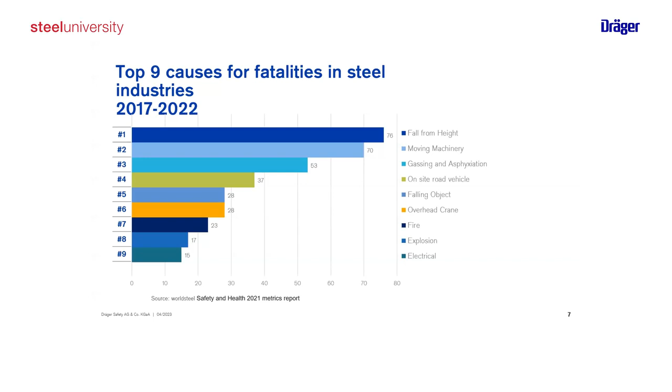Where do we have the risk of gassing and asphyxiation? Think about confined spaces. Think about risk assessments, risk assessments for confined space entries. Think about clearance measurements, leakage detections. If you want to do proper measurements, it's also about sensor selection. And of course, we have different kinds of work which is carried out that needs a risk assessment also for the risks of gassing and asphyxiation, for example, maintenance work.

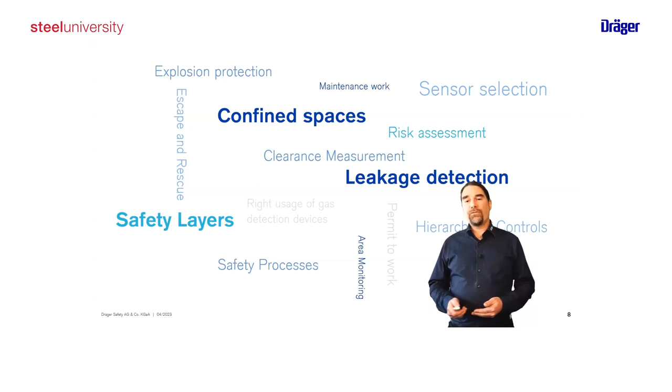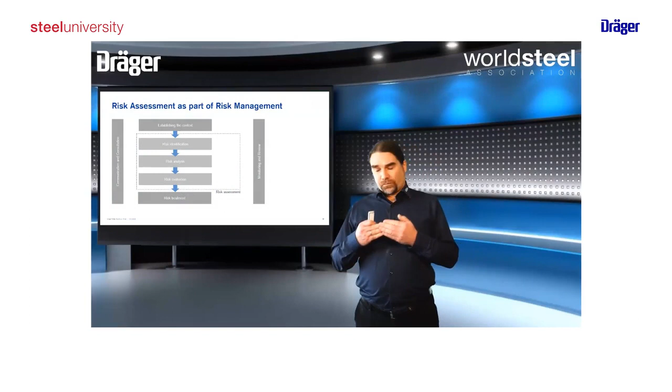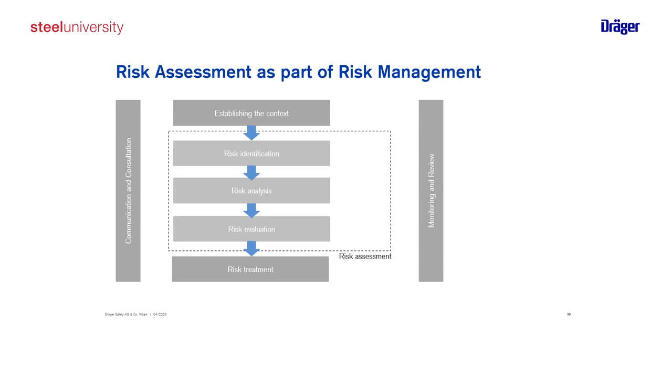Now, we will have a little bit of a deeper look into the topic of risk assessment. You all know this diagram of our risk assessment process as part of risk management. The first question we always need to address is establishing the context for which we are doing our risk assessment within our risk management. After that, it's about risk identification, risk analysis, and risk evaluation. After the risk assessment process, we are selecting countermeasures against the risk to reduce it. Let's call it risk treatment.

It doesn't matter which method you have chosen to use for you and your company. One approach is the bow tie approach. Within the bow tie approach, we have hazards which can lead to an event. This event is based on a threat and leads at the end to some consequences.

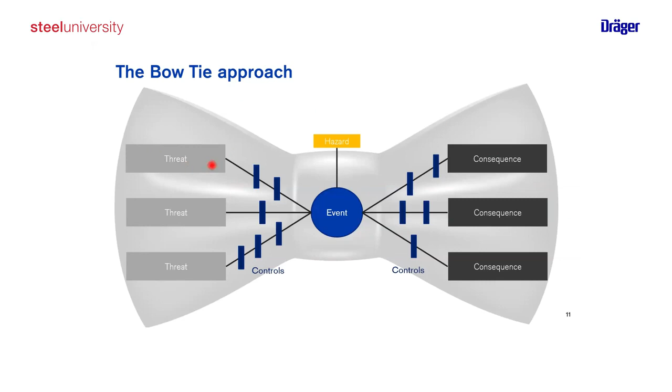The task of risk assessment now is to identify which threat leads to which consequence and which control method is effective to reduce, for example, the threat on the left side of our bow tie, or to reduce the consequences on the right side of our bow tie.

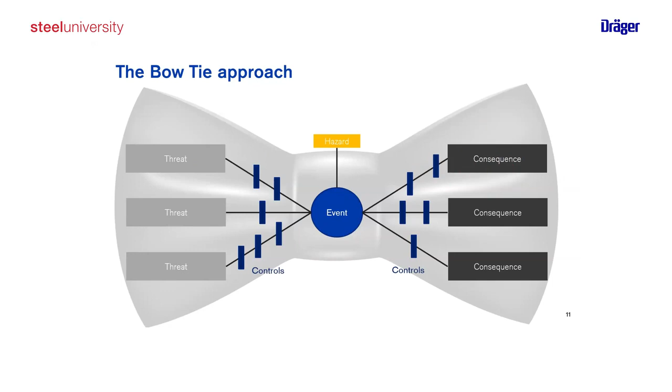Why are we doing this? We are doing risk assessment and risk management to protect not only property like facilities, vehicles, machinery. We are doing this not only to protect environment like lakes, the sea, the forest, soil. We are doing this to protect people - our colleagues, our employees, and also the people in the near surrounding, the neighbors of plants and facilities.

Now we go a little bit deeper in our risk assessment process. Risk identification is about finding, identifying, and describing the risks. So if you do not know what we want to talk about, if you do not know what we want to analyze afterwards, we have no chance to find measures to reduce the risk.

After risk identification, we do the risk analysis. Risk analysis is a systematic procedure to determine the risk. Of course, there are different ways to do this. A little bit later on, we will show you some or one of those methods and give you examples for that.

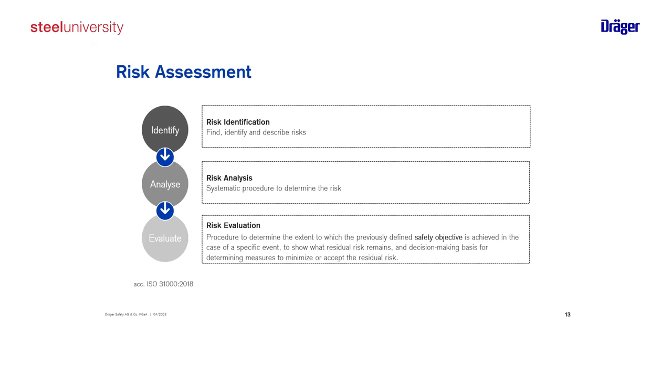We also have the likelihood, from rare - meaning this event takes place very seldom - up to almost certain. To give it some words: if you think about hitting your hand with a hammer and you do this once in your lifetime, it's rare. If you do this once a day, I think we have to consider other measures.

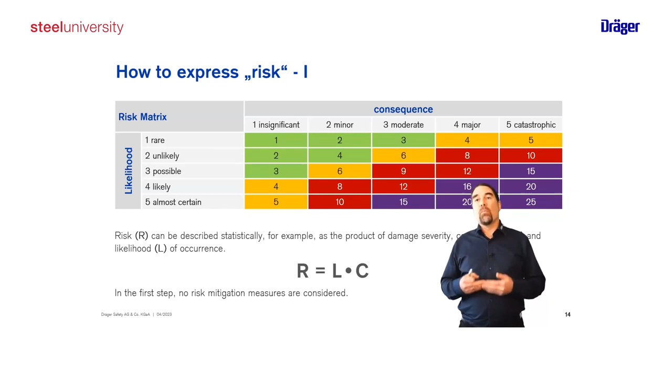Our risk can now be described statistically as a product of damage severity multiplied with our likelihood of occurrence. If we do this in the first step, we are not thinking about risk mitigation measures. We are calculating what will happen completely without any mitigation measure.

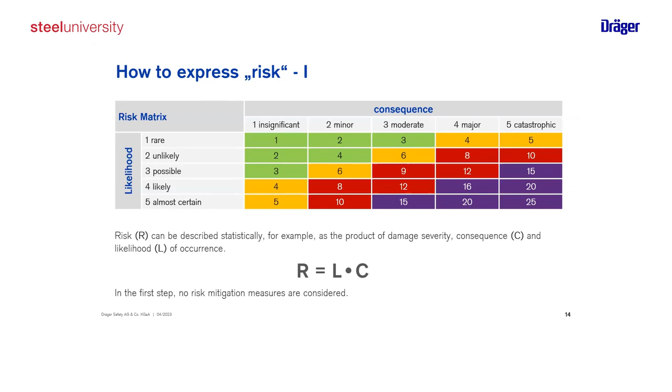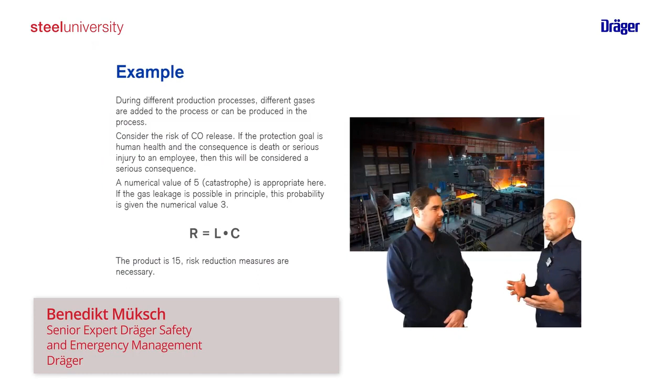So, Benedikt, may I please invite you to give us now an example from your practical experience? Yeah, thanks, Ulrich. So during the processes at our customers, there can be several gases produced. And today I would like to talk about carbon monoxide, which can be released in different processes too.

Have you an example for a process with carbon monoxide? Yeah, of course, the whole steel production. So if we have a combustion, there often is carbon monoxide which is released during the processes. A good example is pits - a lot of our customers have pits where the steel is brought, and there is carbon monoxide.

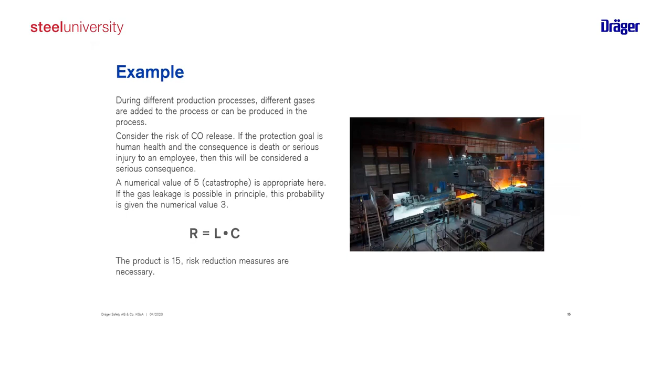As we stick to the example, for the risk assessment we have a serious problem if there is carbon monoxide and we do not have any safety measurements. What kind of problem would that be? The toxic problem of carbon monoxide. If there is a certain amount of carbon monoxide in the pit, and an employee goes into the pit to, for example, fix a technical problem, there is a concentration which could be toxic to the employee. So this would be, if there's no safety measurement, a catastrophic problem and could cause the death of an employee.

So of course, you always have certain safety measurements at your plants, but we just take this example: the death of an employee is catastrophic, so the severity is given as a 5. For the likelihood of this, we have taken a value of 3 in our example. So the product of this is 15.

So if you think on your processes, do you see also a likelihood of 3 that there can be carbon monoxide? And can you follow Benedikt in his example that this event - carbon monoxide present while a worker is inside - is catastrophic? I think there's no questions. So, Benedikt, please proceed with this example. Now we are taking countermeasures.

Yeah, as we implement safety measures, for example technical measures, such as having no leakage, you have flanges which are very good. So you can reduce this from 3 maybe to 1, giving you a much more safe process. So you are reducing the likelihood at this point, due to the technical measures.

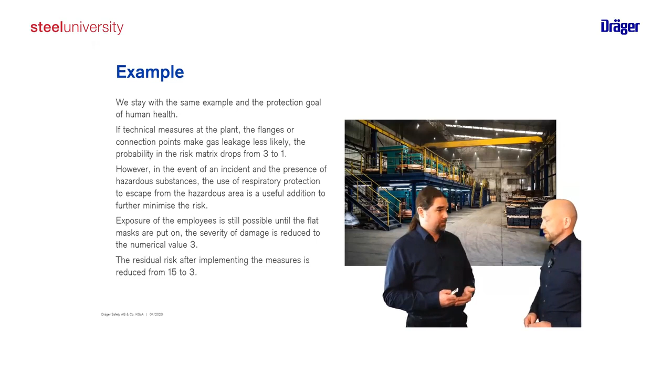So thank you very much, Benedikt. I will come to you a little bit later with more examples.

So now we have the risk of something we cannot directly see. We have an invisible risk. Within our risk management process, within our risk analysis, we are not able to express this invisible additional risk. I will give you now an approach of how we can make the invisible visible also in our risk assessment.

We are only adding one more factor in our equation, the noticeability N of a hazard. This noticeability can be immediate, for example you see it directly. Then the total risk is not increased because the factor stays 1. In our example it's possible, catastrophic, 3 multiplied with 5, we have 15, but because you can directly identify and see this risk, it stays at 15.

But we are talking about carbon monoxide. Carbon monoxide is a highly toxic, invisible, tasteless gas you're not able to notice. It's invisible to human beings. So our noticeability factor becomes 5. Our total equation, 3 multiplied with 5, possible multiplied with catastrophic, multiplied with invisible, becomes 75 at the end of the day. Now we are able to express our visibility, our noticeability of hazards, directly in our risk equation.

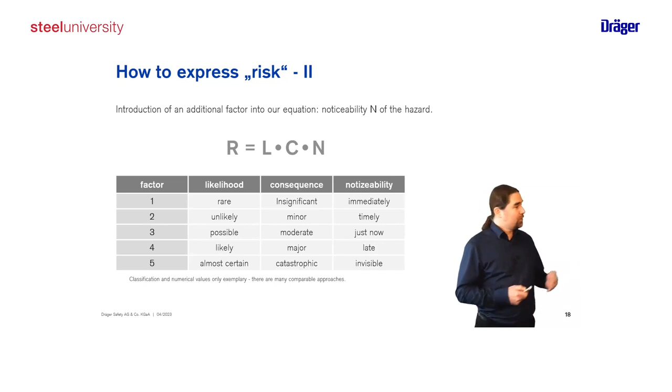Benedikt, I want to have one more example. Can you please give us here one more out of your experience?

So what can be the right thing at the right time if the gas alert sounds? For example, they need to know the right escape route, they need to know what protection equipment to wear to have a safe escape. And nevertheless, if there's a complex situation, you may need a rescue concept to bring, for example, some employees out of a confined space onto the earth floor side, to bring them outside to a safe place where you can then see if every one of your employees has made it to the safe places. So thank you very much, Benedikt.

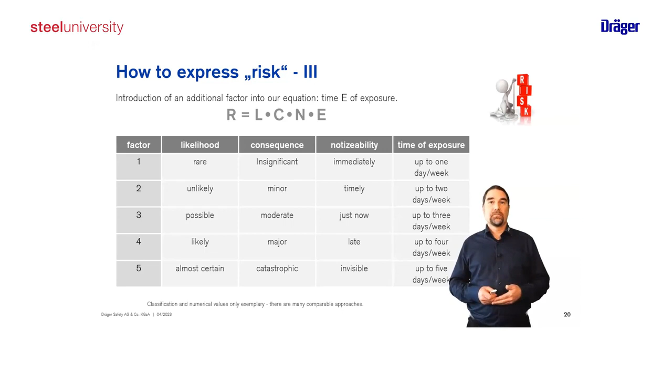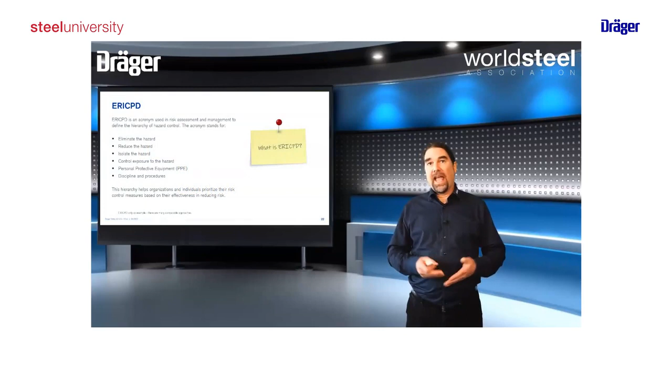This leads us to the hierarchy of controls. This hierarchy is based on different approaches. One approach is STOP or STOPP. Another approach is ERIC-PD. I will stay with ERIC-PD for today.

ERIC-PD is an acronym used in risk assessment and management to define the hierarchy of controls. It stands for: eliminate the hazard, reduce the hazard, isolate the hazard, control exposures to the hazard, personal protective equipment, and discipline and procedures. Discipline and procedures means employees must not only have personal protective equipment, they must also actually use it.

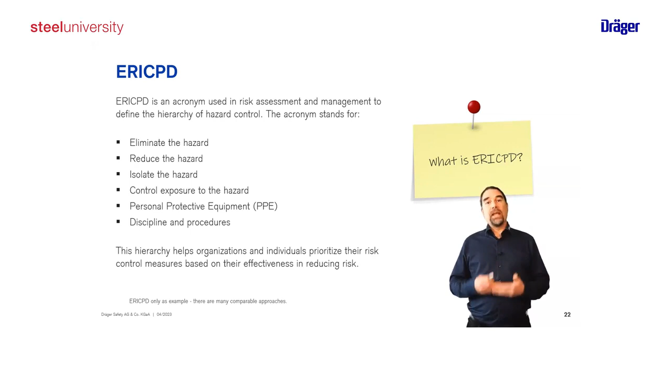With this hierarchy, organizations are helped to prioritize their risk control measures based on their effectiveness in reducing risks. We can also draw this as a cone. The first step is always elimination, physically removing hazards, because this protects not only one person or a small area, but many persons and larger areas.

Maybe we can replace or reduce the hazard, also called substitution. We can isolate the hazard, or isolate people from the hazard, for example by engineering controls. Our control measures can also be administrative, for example telling employees that only one person needs access to a dangerous area instead of five. At the end of the day comes personal protective equipment and discipline and procedures.

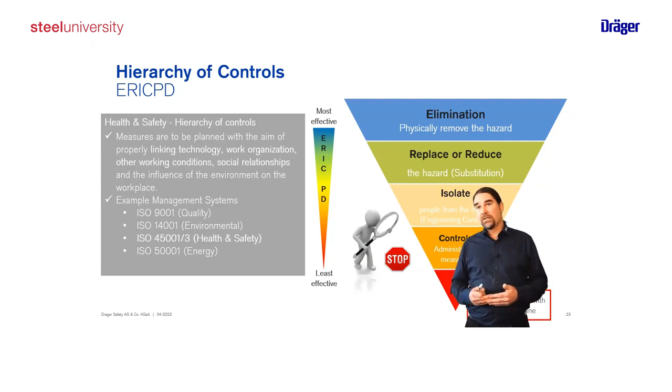Personal protective equipment should only be the last thing considered. It is not against the main risks of a process, but against the remaining risks after taking all other measures like elimination, replacement, reduction, isolation, and controls—because it only protects the one person using it.

If you want to go deeper into the hierarchy of controls and ERIC-PD or other methods, please have a look at different ISO standards, for example ISO 45001 or 3, about health and safety.

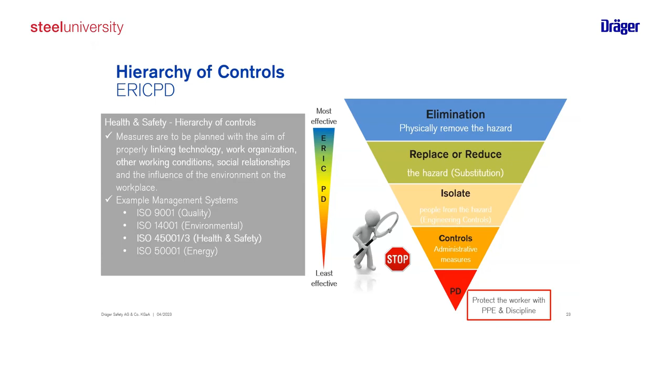Now we come to our next example about ERIC-PD. Benedikt, would you please join me once more, giving an example on elimination and reduction of hazards? Due to the processes at our customers, it is often not possible to eliminate or substitute a certain process point, gas, or product. So if you want to implement measures, you often have to go to a technical part—you have to implement engineering controls, such as suction, for example to remove carbon monoxide from a pit. With a suction device you reduce, or in the best case eliminate, the carbon monoxide in a smaller or larger area, depending on the setup of your suction devices.

That's right. Of course, you need to do a clearance measurement before working in these places. Even a pit, if it's large and wide, could be a confined space because of a dangerous gas like carbon monoxide, so you need a clearance measurement before sending employees in. Confined space entry is even a bigger part because you have to consider many more safety measures for this. Nevertheless, you need an organizational topic too, the alarm management and emergency management, as I said before.

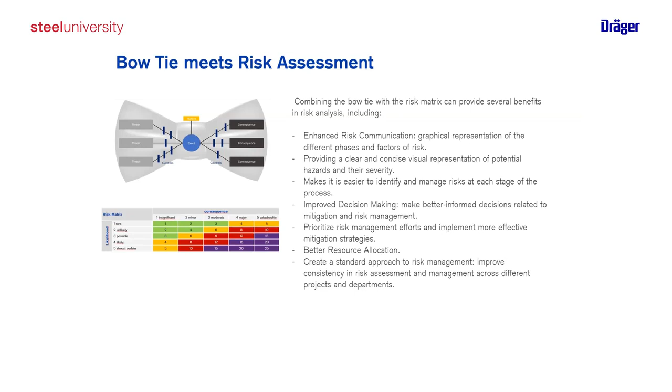Now, by giving it numbers for likelihood and consequence, we have at the end a risk given by a number, and we can compare the risk also across different departments. Easy, or?

Overall, our combination of bow tie and risk matrix is offering a powerful risk management tool which helps organizations in identifying, assessing, and mitigating risks across different phases and factors of risk.

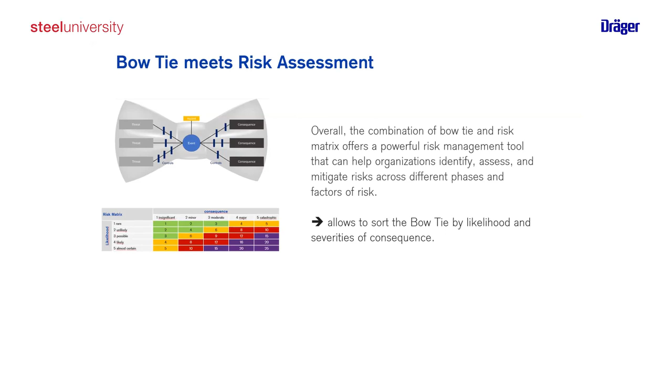To have this in only one sentence: combining the bow tie with our risk assessment approach with our risk matrix, we are now able to sort our bow tie by likelihood and the severity of consequences.

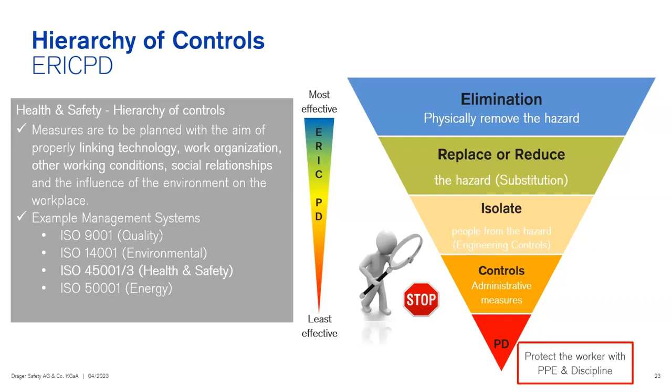Sure, that's great. I mean, you can probably take the slide off now so we can see you again, if that's possible, studio guys, so we can see our presenters. Oh yes, of course, there we go. Back to the green, that's great.

I think I have another question here. You guys work in many industries and have perspective and views across a lot of sectors. What would you say, particularly in the steel industry, are the major challenges we face in implementing these kinds of risk reduction strategies, perhaps compared to others?

Yeah, it's the same topic, it's safety culture. So what is the awareness of the employees about risks and hazards? What do the employees want, what are they capable of doing with risk, and how do they proceed with these risks? So it's also a safety culture thing.

Yes, okay, one more has come in. Perhaps it's exploring the hierarchy of controls again. Just an example, I know we're here talking about asphyxiation, but one of our participants is asking particularly about work at height, maybe that's a good example. If you've got a job that has to be done at height and you can't eliminate the fact that the height is there, what kind of controls could you use to reduce and control the exposure to the hazard?

I want to simplify this example a little bit. Is this working at height done with a ladder, for example? You can replace the ladder, for example, with a lifter.